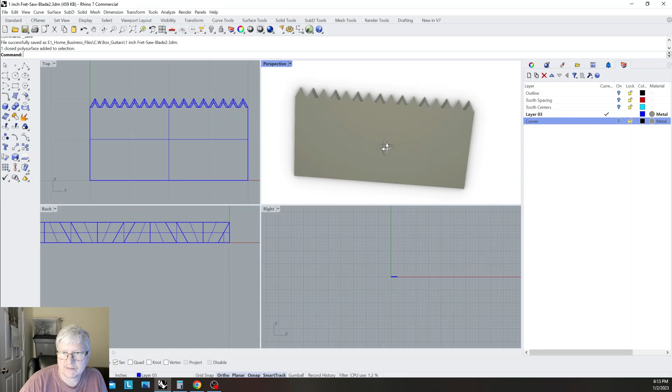And anyway, this is the saw, the blade itself. I'll draw the handle in later. And I thought, well, let me see if maybe there are some people out there in the world of the internet and YouTube that may want to take a look at how to draw this saw blade in Rhino. So that's what we're going to do.

So save the copy that I've already drawn. I'm going to go create new, and we're going to look at the small objects inches template for Rhino 3D. My blade that I'm using is a standard Lenox hacksaw blade. I'll post a link in the information for the video. You can buy these at, if you don't already have one lying around your shop, you can buy these at Lowe's, and they're fairly cheap.

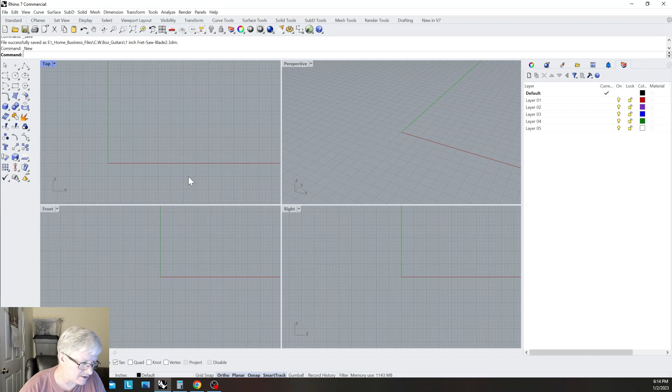But it's almost exactly half of an inch wide, top to bottom. So let's start there, and I'm going to look at this top perspective. If you double click on that, it enlarges the window to full screen. And I'm going to click on, this is the Polyline.

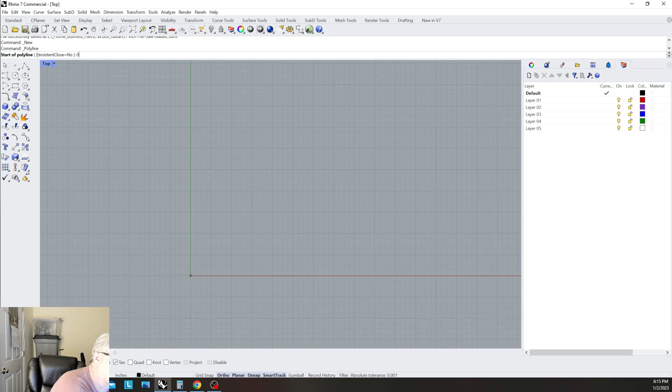I'm going to click on Polyline, and where it asks me to start the line, I'm going to set X0, Y0. Just type in 0, 0 and hit enter, and that's going to take me to the origin. And then I'm going to move my mouse over into this direction. And then if you look in the command window, I'm going to make 1 inch of blade. So I type in 1 inch and hit enter. Now I'm going to scroll my mouse wheel up, and that'll enlarge the view. That's how you zoom in Rhino.

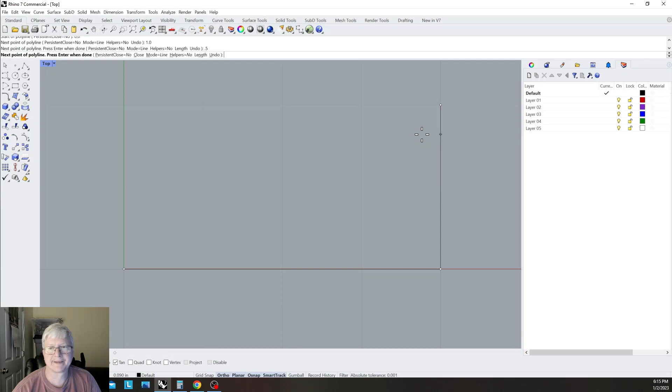Going in the same direction, or going in the up direction, I'm going to click 0.5 because it's half an inch and enter. And then I'm going to go back across to 0, and since I have the Smart Track on, I can go down here, and it'll track me to and snap to the 0 for the X. And then now I just go down to the start position and click left click, and it stops. And now if you look, highlight the segment we drew, it says one closed curve.

So now we have one closed curve that represents a segment of what will be blade. Now when we started Rhino, we have some default settings, and in those default settings, mine I need to change, I guess, but it creates this default layer, and then these other extra layers in the layer manager. And we're not going to use all these layers, so I'm going to go ahead and highlight those two and delete them. I know I'm not going to use those.

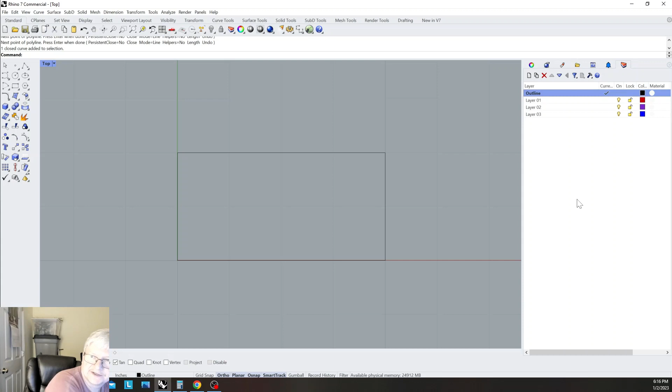And the default layer, I'm going to right click on it and rename this layer, and I'm going to call this outline. We're not going to keep any of this when we're finished. We're only going to keep the blade.

So now we have the outline, and now I want to go to layer 1, and I'm going to rename layer 1, and I'm going to call this tooth positions.

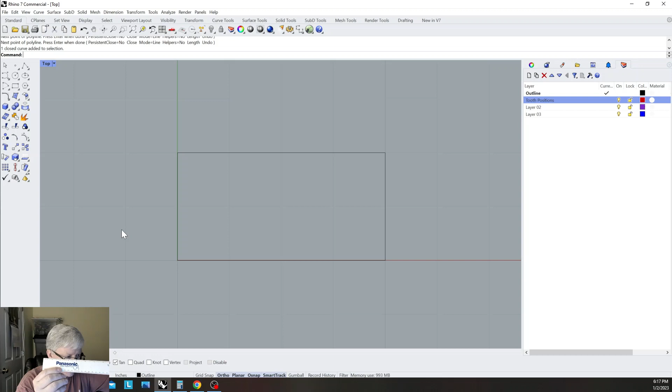Okay, and I am using a standard ruler, just imperial. I have 1/16 of an inch segments on here, so I'm going to space my teeth 1/16 of an inch apart. So depending on how you position it, that's 15 teeth per inch or 16 teeth per inch. The way I'm going to position it, I'll have 15 teeth.

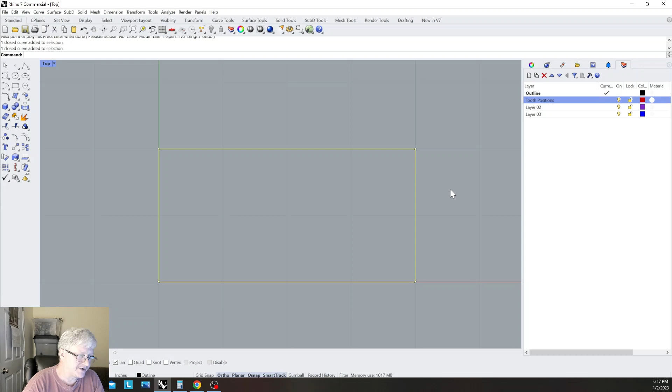But I also wanted to show you something. When I highlight this, what we drew earlier, because we started drawing a polyline and we didn't stop the command, it continued and made this entire closed curve. I'll show you why I wanted to emphasize that.

I'm going to look over here at my layer manager, and I'm going to make the current layer the tooth positions layer, which is going to be red. I'm going to go back here to the polyline and left click on it, and I'm going to click on this endpoint or intersection that will be the top of the blade.

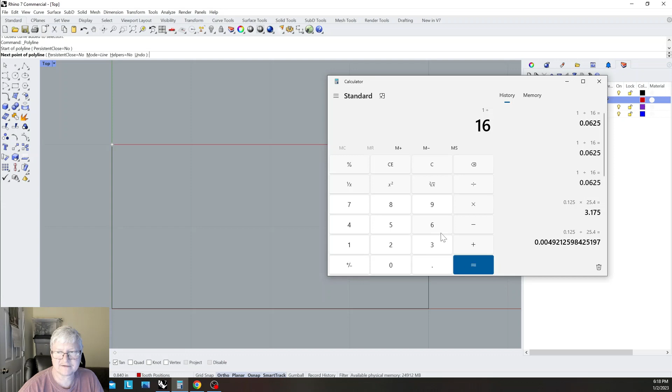Now I've selected it, and I'm going to start moving in this direction, 1/16 of an inch, which is 0.0625. If you take 1 and divide it by 16, which I've already done, you end up with 0.0625 in decimal. I'm going to paste this in here and start moving in this direction and hit enter. See, now it drew a red line 1/16 of an inch over.

And I'm going to go on down here until I am perpendicular and intersect the bottom of the blade. Left click, and now that I'm done, I'm going to right click.

Now I did this because I want to demonstrate to you, if you have a situation where you have joined curves and you don't want them to be joined, you highlight them and hit this button that looks like an explosion, because it is. This is explode, and what it does is break everything up to the smallest division. So if it's curves, it breaks them into individual curves. If it's surfaces joined together, it breaks them into individual surfaces.

And now see what this does for us. We can select the curve here, or we can select this curve. So now what we want to do is spread these out for measurements all across the top of our blade. There are a few different ways you can do this, and one good thing about Rhino 7 is most things have 2 or 3 different ways to do them.

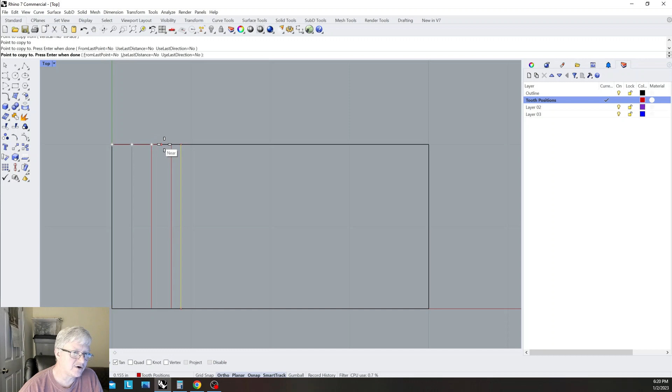Since I'm using transform copy, I left click, and as long as I don't right click or hit escape, it will continue to copy as many copies of this line or curve as I wish. So let's go ahead and do that and cover the blade, and now right click to stop. Okay, so those are our tooth positions.

I'm also going to do some vectors, some curves that will become vectors later for tooth centers. Now, you don't have to do this. I'm going to do this because I am making a jig. Later, I'll use this to make a wooden jig where I can clamp a piece of steel or an old blade and remake this.

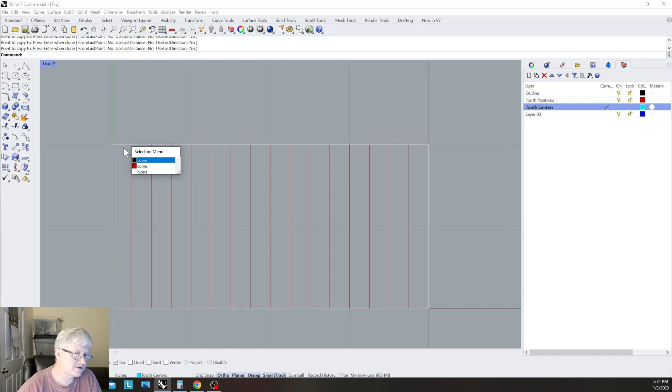So now I need to make it current. And you remember that little segment of blade, that curve I left up here? Watch how this is going to come in handy. I have my snap set also to the midpoint, so I'm going to choose a polyline again and see how it lets me snap to the middle. I'm going to snap to the middle, and draw another line that's perpendicular to the top of the blade. And again, I'm going to highlight this.

This time, let's use this copy here, the copy command. Now it's going to ask me where to copy from and then where to copy to.

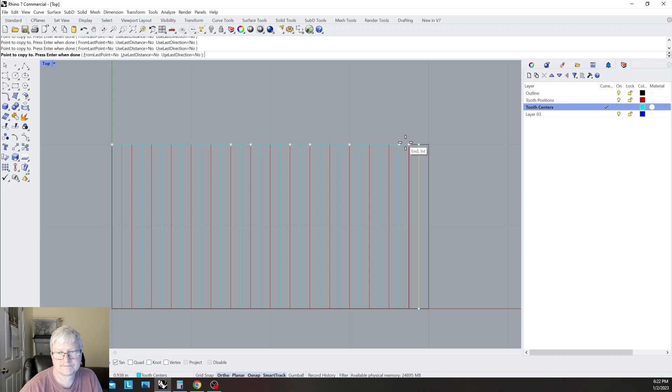Okay. Oh, messed that one up, didn't I?

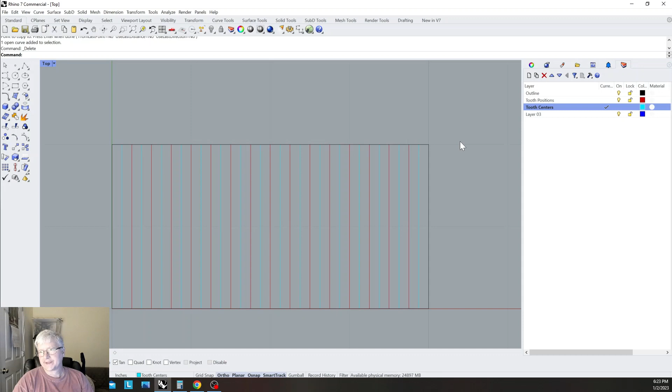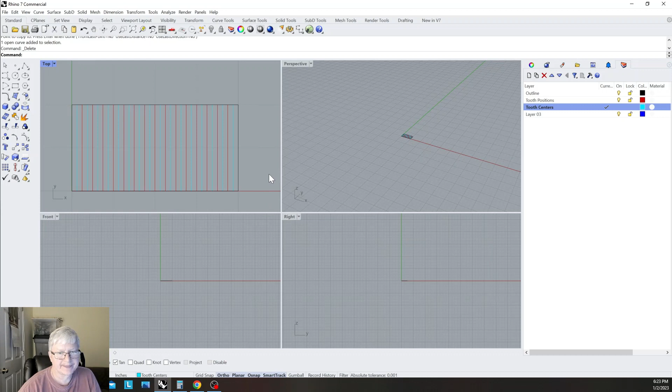Okay, so now I have tooth positions and tooth centers, and I'm going to double click this top viewport, and it'll zoom back out, and I can look at all four viewports. If you drag these you can enlarge the view you want enlarged. This is perspective, which is the 3D view. Of course, we don't have anything 3D yet, but okay.

So now I'm going to double click on this. We're going to be using a triangular file for sharpening the teeth once we start notching this blade, and the faces on the file are 60 degrees apart.

So we're going to click anywhere up here, it doesn't even matter, and we're going to go to layer 3. Yeah, let's do layer 3. We'll leave it blue.

We are going to click on the corner of the top of our blade, anywhere here, it doesn't matter. We're going to trim this in a minute. Now we're going to select that segment we just drew, and then we're going to say transform, rotate. When we go to rotate, the software is going to ask us where the center of rotation is going to be based upon, and then it's going to ask us for the first reference point, and that's going to be the end of our line.

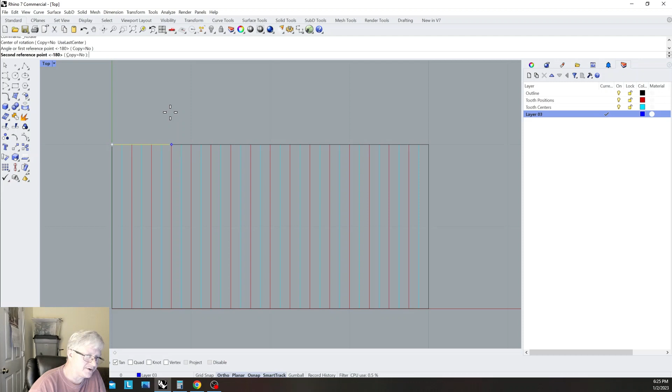Now we're going to go. We're doing 60 degrees. Okay, and I hit enter. Now watch, I hit line.

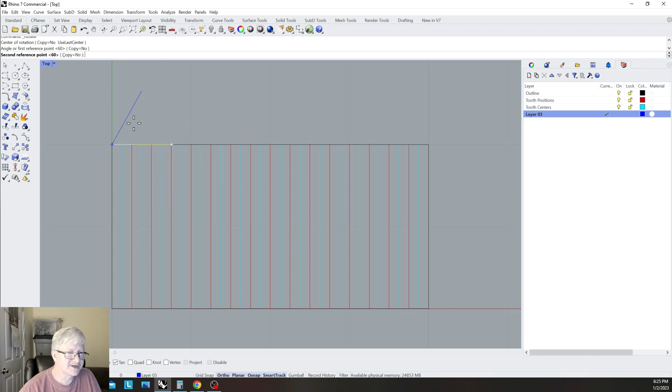And let's do here. Select our curve, rotate here to here, or that would be the center, and we're going to go minus 60 degrees. Okay, because we're going the opposite direction.

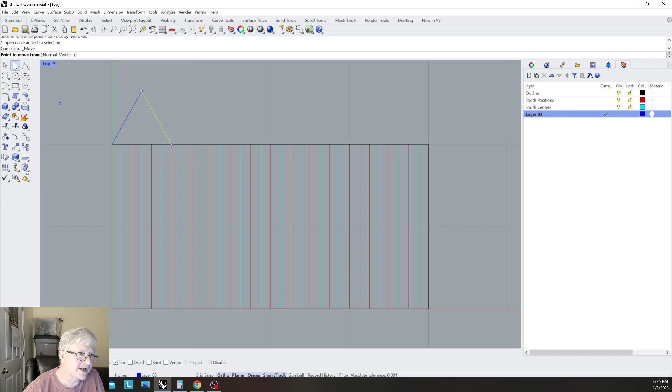Okay, now if you look at our tooth spacing, we're going to click on this curve, and we're going to use this move command, and it's going to ask us where to move from, and we're going to click on that mark and go over to this mark.

Now that these are intersecting, we can highlight both of these and we can type in the command trim. It's going to ask us the objects to trim. And you probably noticed I dragged from right to left.

So in Rhino, if you want to highlight a single item, if you drag from left to right with your mouse and let off your button after the selection window is covering your object, it will only select an object if the entire object is in that little view window. If you want to select everything that's attached, connected, overlapping, or intersecting, if you drag from right to left, everything it touches is selected.

Okay, so now we have one tooth, except now the tooth is of course above our workpiece. I'm going to temporarily select those and type in join, and that'll join them together.

If you don't remember that, which you should, you can go to where it looks like two puzzle pieces been placed together. That icon is also join.

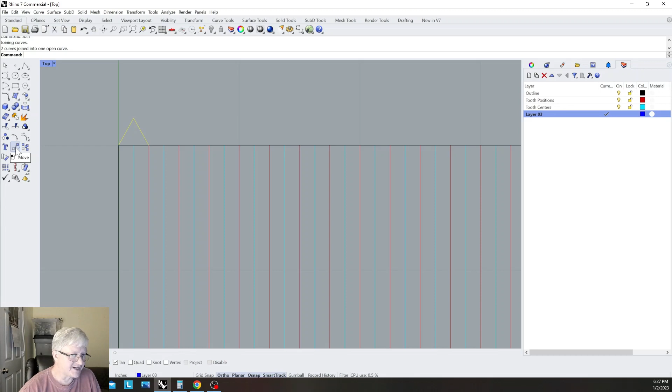And now we're going to take these two segments that make up a tooth, and we're going to move them. Select the point, center point.

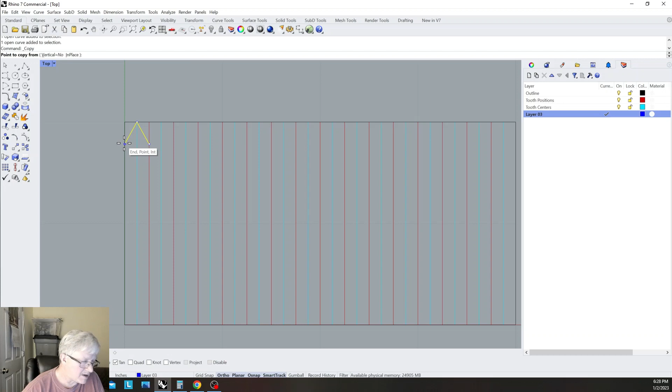Okay, so now that we have one set, or one tooth, we'll highlight that tooth. We'll go to transform and then copy, and then you can do it here or you can do it here. Either one's fine. I'm going to use the bottom of the base, left base of the tooth, but anywhere that you can align these is fine. It's up to you.

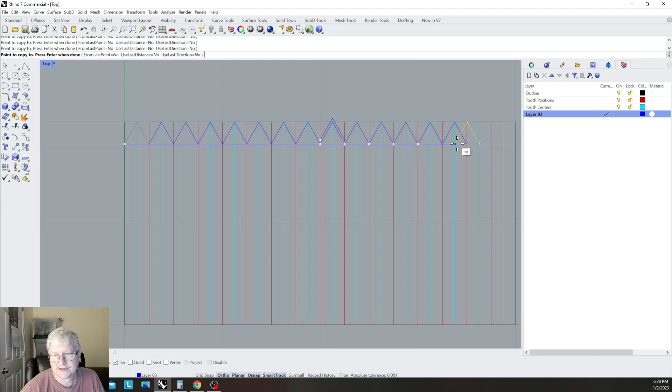Oops. Yeah, I'll just delete it out. I also have near selected, and I need to uncheck that in my snap settings. Yeah, down here I'm going to uncheck near.

Okay, so now we have all of these teeth, and they're all aligned onto the blade, and it's 2D.

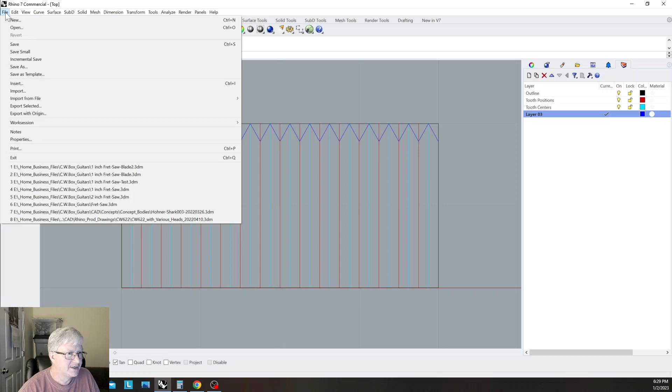Okay, so now is a good time to save our work. We're going to say save as, and let's just call this blade segment. Call it whatever you want. In fact, no, let's call it fret kerf cleaning blade. Good enough. And save.

Okay, so now you saved your drawing, and you have a 2D copy of your drawing. Now, we don't need all of this outline stuff now. So let's click on that outline, and keep in mind right now it's all a closed curve.

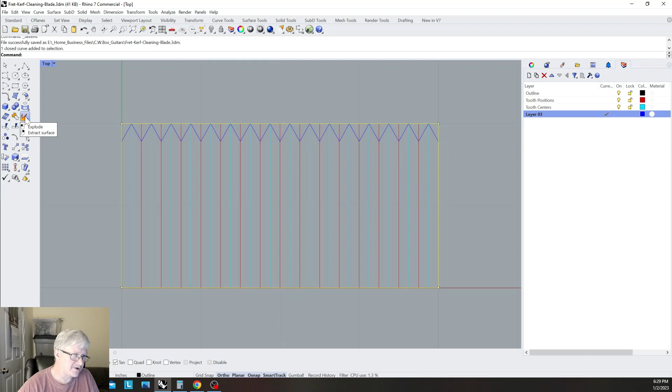So let's hit our explode, and then let's delete this top line. Let's delete that little fragment, okay? And then I want to show you another thing, well, first let's cut these off.

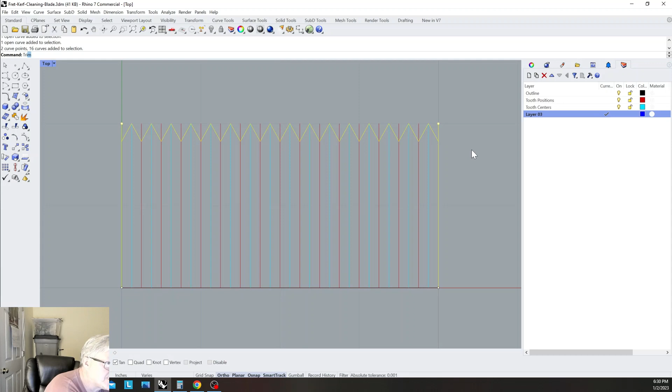I'm holding down shift when I want to select more than one object. So I'm holding down shift, I'm going to right click and left click and drag left to right. Now that I've selected it, I'm going to type in trim, and I'm just going to trim these off.

Okay, so these really don't have to be in this outline anymore. I want to show you how to change layers. We're going to select these three. Temporarily, let's join them - that's either this icon or type in join.

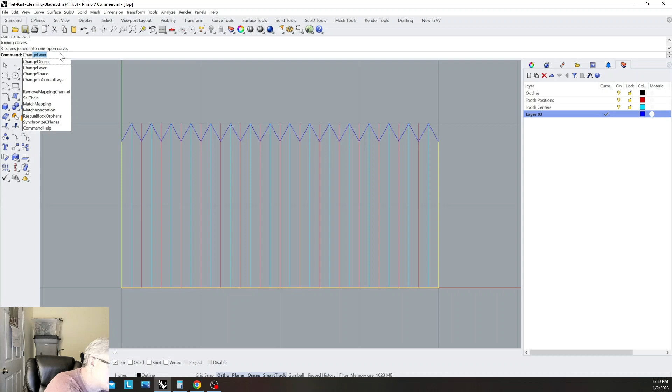Now let's go up here while we have them highlighted and type in change. If change layer is the command, keep typing and eventually it'll come up with whatever it recognizes you may want to use. And then we have this layer 3, that's where we're going to move them to. So now the teeth and this outline of the blade are in the same layer.

Now you can round this off the radius if you want. I'm not going to, because this is going to be a cut off segment of my hacksaw blade that'll be residing inside an oak handle, small oak handle.

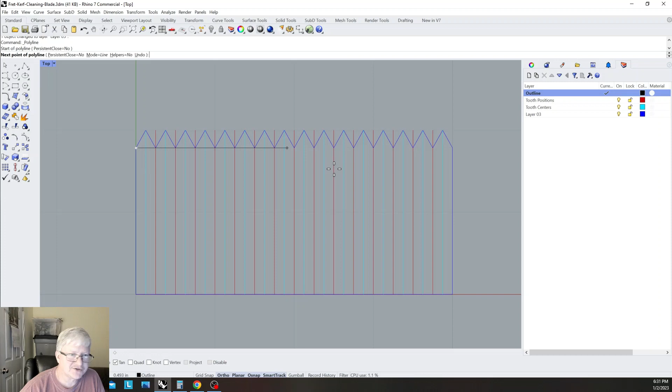Okay, but see these lines here? We don't want these to get in our way and confuse us, so let's go back to the outline layer and select it, and let's click on this polyline and draw a line across here. Left click, drag and highlight all of these, and type in split.

It's going to ask you for the cutting object. Let's select this line that we added and hit enter. Now look at what it did for us - every one of those lines has 2 segments now.

So now what we can do is we can go over to our layer 3, and we can toggle it on off, which is the light bulb. And now anything we do to this won't impact layer 3, it'll only impact the visible layer.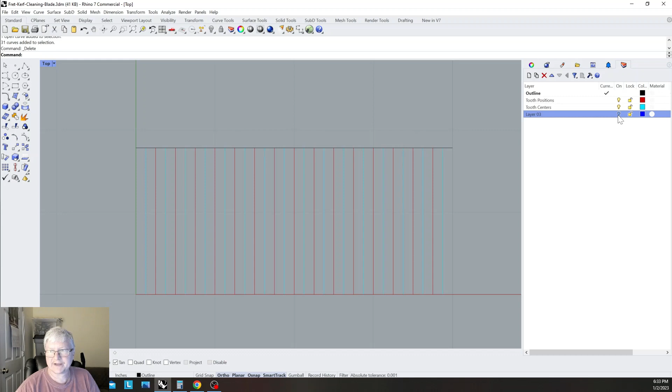And now we can start up here really close to the top of these lines and drag and select them and hit delete. And now let's turn that back on. Okay, and it's a good idea to hit save from time to time - you don't want to lose all that work.

Okay, so now we have this segment of the blade and we have the teeth. But our blade is 3-dimensional, it's not 2-dimensional - it's 3-dimensional, and it's 23 thousandths thick. And on top of it being 3D, 23 thousandths thick, it also has teeth that will be sharpened at an angle, and that angle will be 60 degrees.

So that means that as you're looking at one side of this blade, every other tooth will be sharpened where it's like a close view to you - that edge is sharp. And then if you look at the back side of that blade, the opposite is true. So this tooth, this tooth, this tooth, this tooth, those will be sharpened toward us. And on the back side, this tooth and this tooth and this tooth will be sharpened going the opposite direction. So that means we still have some work to do.

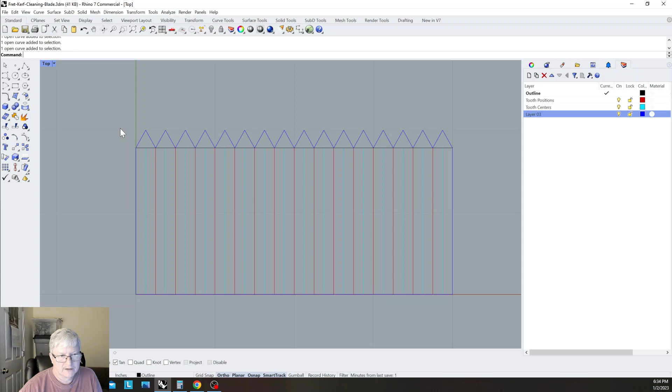And we also are going to need to copy all of this for reference. So let's go out of the top view, double click top, and let's scroll on up a little bit to our front view. And here, let's just double click to enlarge it.

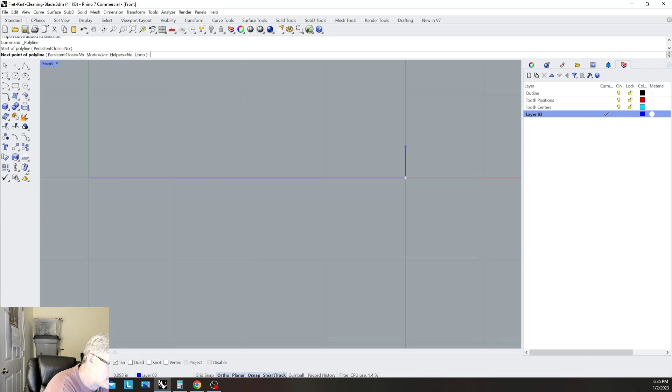And let's select our layer 3 and the polyline. We're going to click over in this corner, and we're going to start going upward, and we're going to type in 0.023. And now we have a 23 thousandths of an inch line there.

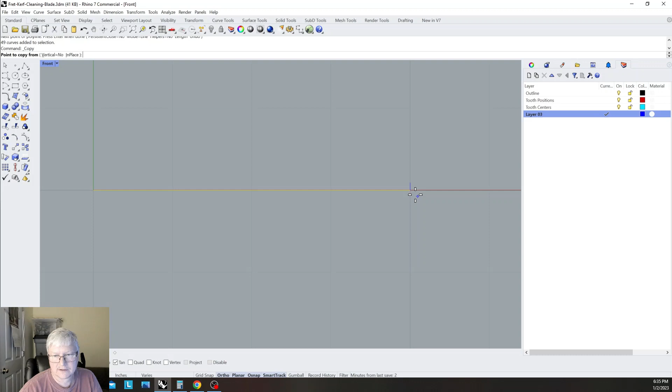Okay, so now let's highlight everything except for that line, and let's hit our copy icon and copy from here to there. Okay, so now what we should have - and by the way, while we're here, let's just go ahead and highlight that, copy from here to here.

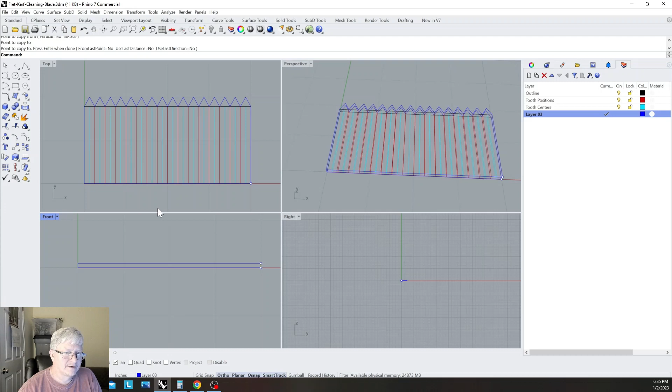All right, so now if you look in the perspective, double click on perspective. Now we have a 3D version of the blade.

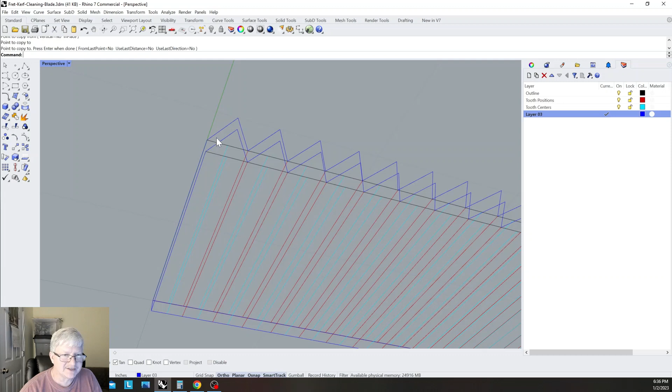Okay, now if you look at the teeth, we're going to sharpen this blade in a way that every other tooth will be sharpened at like 60 degrees - this edge will be 60 degrees, skip one, 60, skip one, 60, and then we'll alternate. The back, it'll be 60, but going in the opposite direction. I'll show you what I mean by that.

We're going to get our reference marks. If we go from here, it should be plenty long enough - here to here with a line. Now we select that curve and we say transform, rotate.

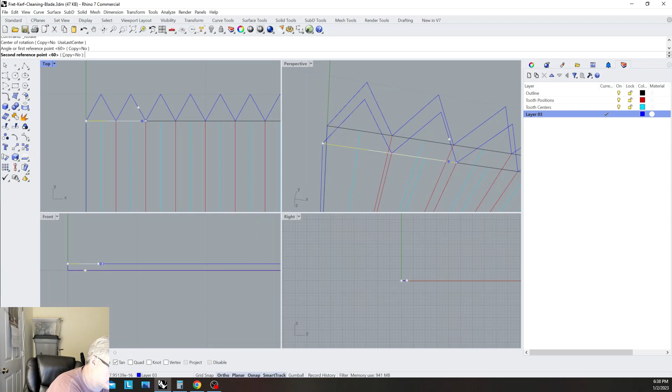And this is going to be the center of rotation. So minus 60 degrees. And if we rotate this view, what you should see is that minus 60 degree line intersecting with the back.

Sorry, I'm really sleepy, I apologize.

Alright, so now we have to turn around and do the same thing from the opposite direction. So we're going to click on a line, start our line. I'm going to draw it out here in space somewhere, and that's fine. And we're going to select the line, transform, rotate. And we're going to say, hey, this is the center of rotation.

And this is my line. And now I'm going to go this way, and I'm going to go 60 degrees. And we're done. Okay, so now we go over here and we look, and we have these two lines protruding through that back crossing line that we used for a reference, and that's why we drew that line.

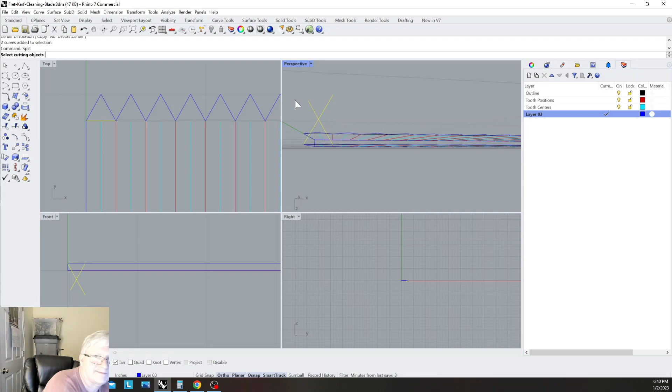So now let's use our new command we just learned a little while ago, and let's highlight these two, and let's say split. And now that we hit this line, those two are split there, and we can hit delete.

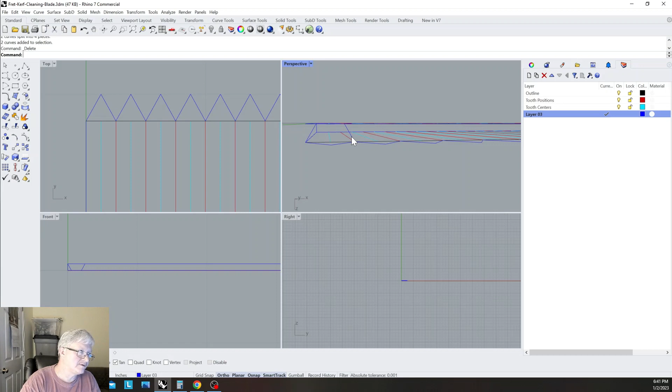So now what we're looking at is this is where we should be touching the blade when we start sharpening this blade at a 60 degree angle. And this is, you know, 60 degree opposite is actually minus 60 degrees, but anyway, complementary.

So now that we have that, we can cheat a little bit. We can take these two lines that we've already made, and we can copy these, and we can take these up here. So now we can copy these, highlight them, hit copy, and we can take this edge, and we can bring that edge to here.

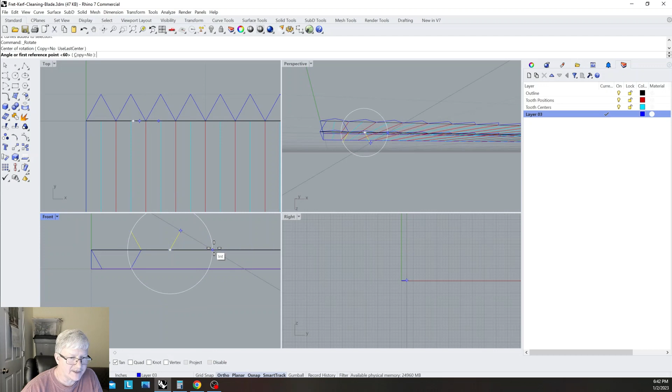Okay, now we got a copy, and now we can highlight those two again, and transform and rotate, and we can say this is going to be the center of rotation, and then we can pull that whole thing apart around just like this. And now we still have them highlighted, right? So while they're still highlighted, we hit move, and we take this intersection and we drag it over to here.

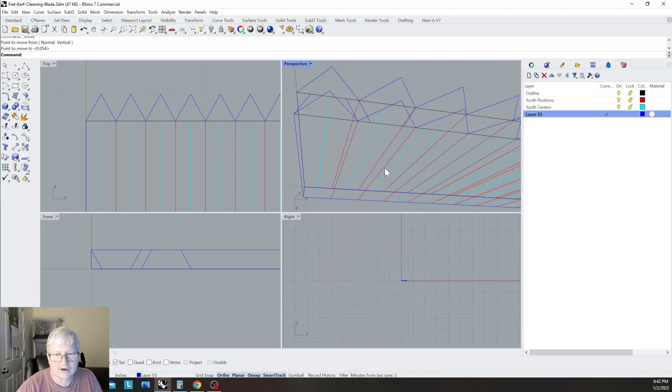Now I don't know if you're starting to realize, or if you're starting to recognize what we have going on here, but now we have these intersection points that we can use for this back triangle that will be the end of the cut.

We just simply click on this, explode it. We're going to explode all of them in a minute, but take that segment and hit move, and move it from here to here. Take that segment, move, and move from here to here.

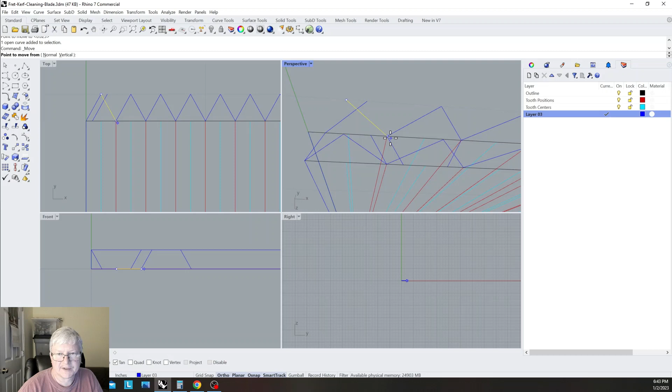And just like we did before, we can highlight this whole thing and type in trim, and then select these two segments, and there we go. So now we have the back, we have the small triangle size, right?

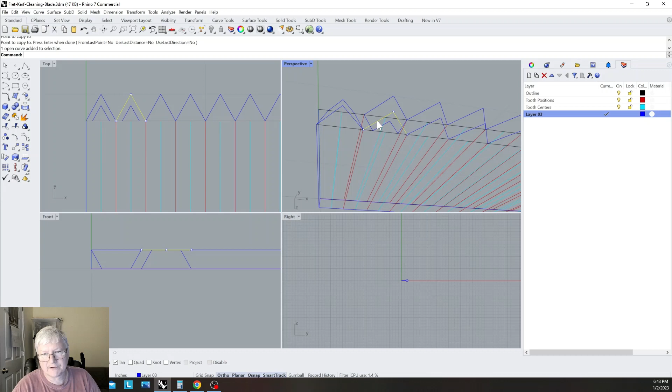So now we can highlight that small triangle, and we can hit copy, and we can copy from this position over to this position. And now we don't need this one anymore. This is what all of your segments are going to look like here in a moment.

And now we have to do one more small triangle segment. Okay, and how we can do this is, and again, it's all about speed. And if you look, we already have a segment that represents what this tooth is supposed to be. So if we go here and highlight that triangle and we hit copy, we can copy it from this point and paste it at that point. And then there we have it. We have full teeth.

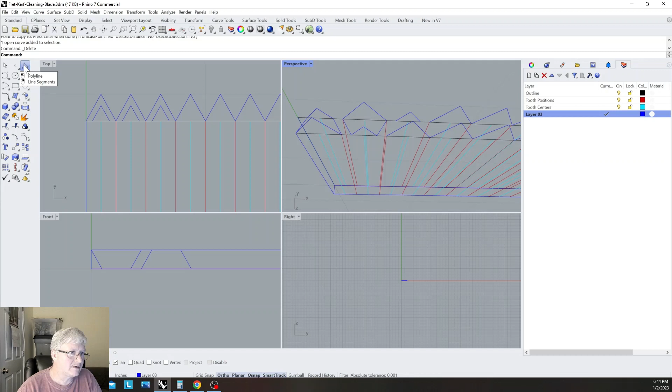We want to leave layer 3 on. We want to click on the polyline. Every one of these areas needs to have a curve. Okay, so that's done.

Okay, line from here to here. Okay, right click from here to here. Right click again from here to here. Right, and we're about to be at a point where we can copy all this stuff.

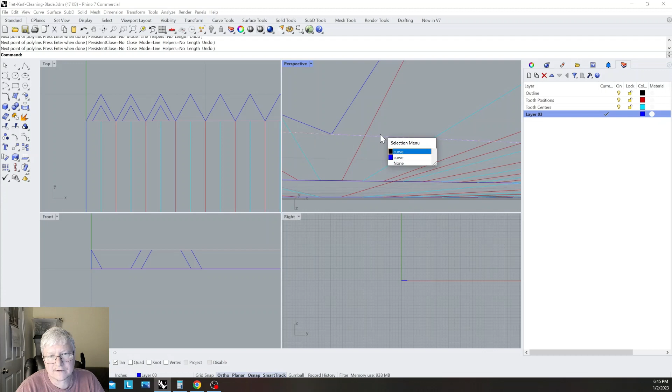Okay, all right. So this is nothing more than a continuation of these segments. So let's do this. Let's go ahead and close everything up. We have to make some surfaces.

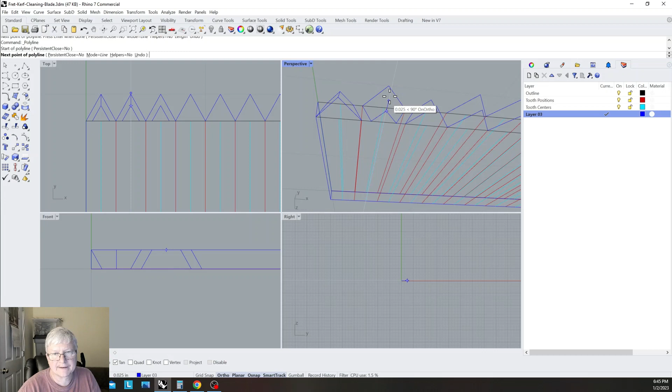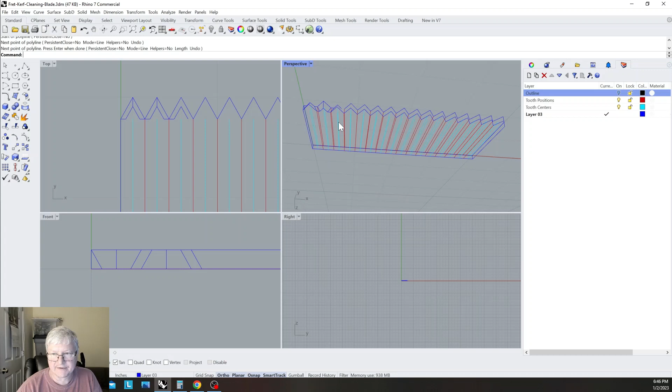Okay, now let's go to the outline and turn that outline off. And what you'll see is we have this segment, this segment, this segment, this segment, the opposite segment, and this opposite small segment. So now we really have everything that we need to finish making the blade.

So what we're going to do, we're going to cheat. First I want to show you a hide command. Left click and drag all of these and type in hide. It didn't delete them, they're just hidden from view right now.

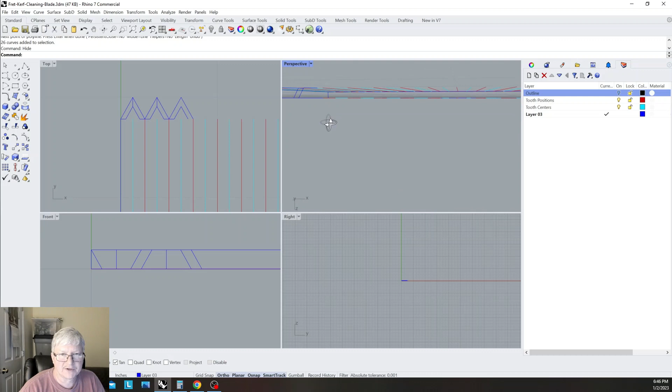Now let's move this around a little bit. We have to keep that segment, but we don't need these segments. I'm going to hide this, same as this, same with this, hide.

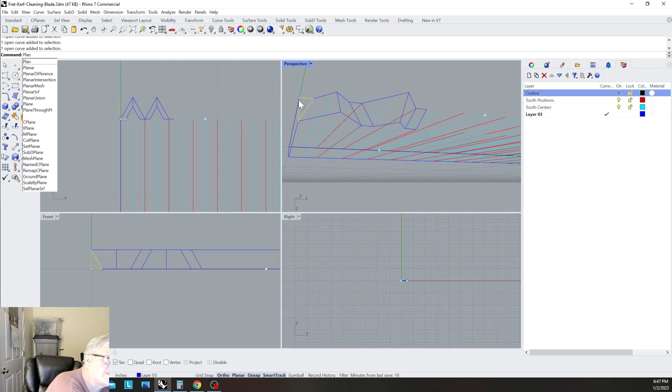Okay, so now we need surfaces, not curves, we need surfaces. So let's highlight a curve. We're going to highlight these three curves, and we're going to type in planar surface. It did surface it, but we need to change our view. We're in wireframe. Go to shaded and you'll see the surface.

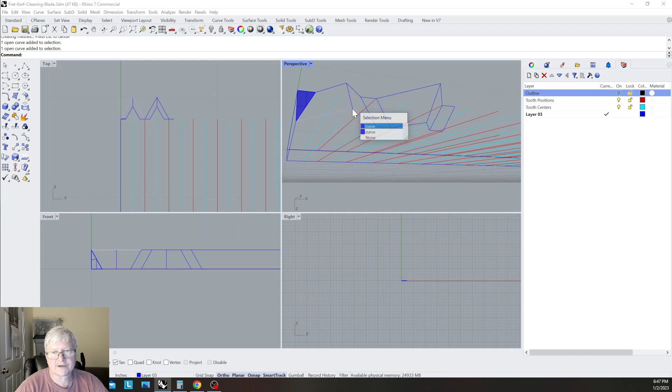So now we right click here and hit curve. Left click, curve, shift. Oh, hold on, we have to explode this stuff. Okay, so now left click and select the curve. Hold down shift and select these, and planar surface.

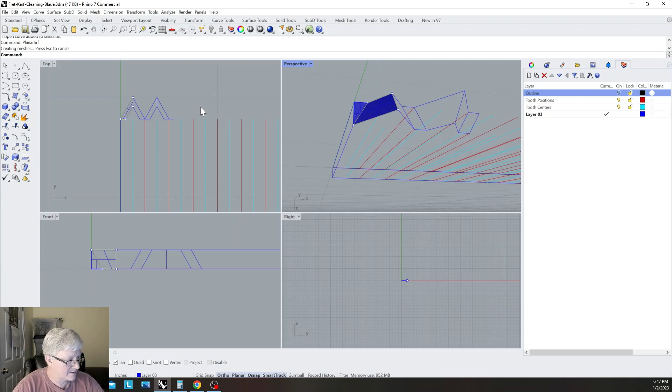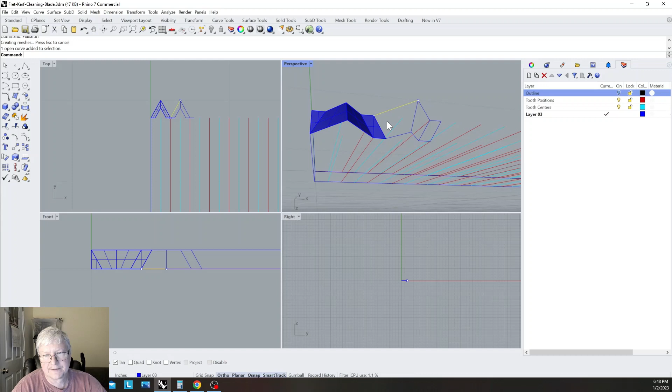Now, just like we did a moment ago, we're just going to right click to use this command again. Left click to highlight everything, right click. Select these, curve, right click these. Right click.

So now that we have all of these surfaces, we're going to select the surfaces, those surfaces, and join them. Let's not join the back yet, you'll see why. We want this surface copied to here.

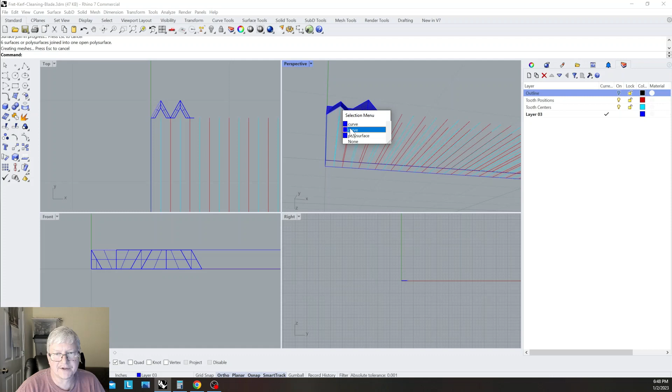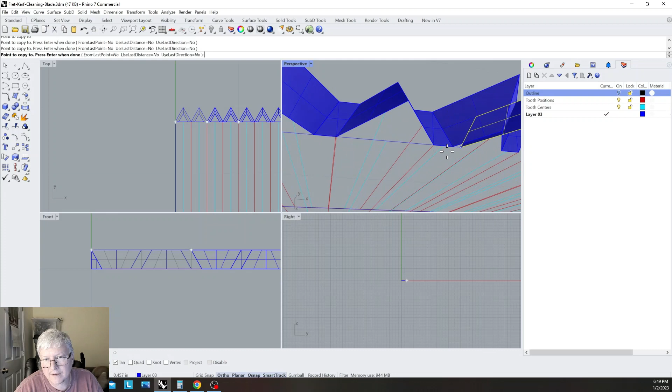So now we're going to highlight that, and we're going to hit the copy command, and we're going to click on that corner, and there. And there. And there. And there. And there.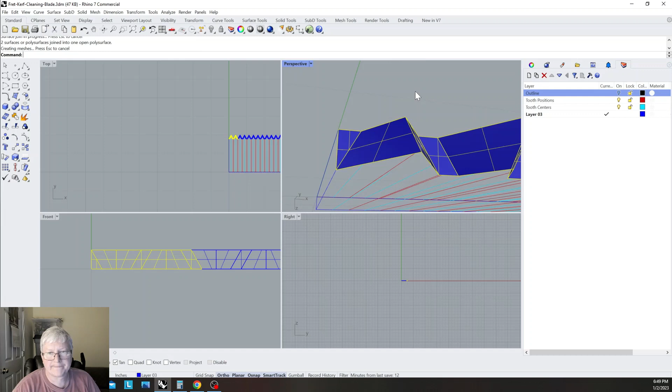Okay, so now we can go over here and select this segment and this segment and join those. Now we're going to go over here to this last segment, and it's hanging over, right? We already have a curve there underneath here, we have a curve here.

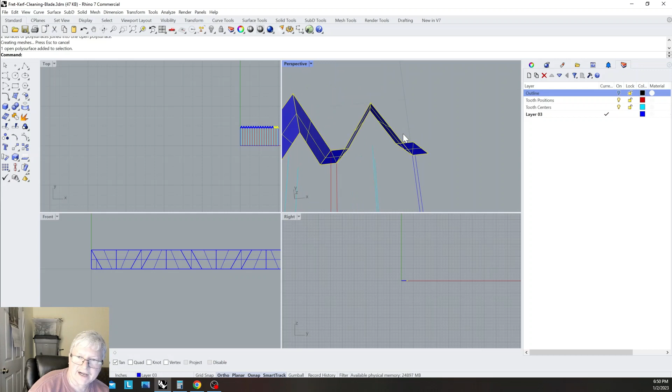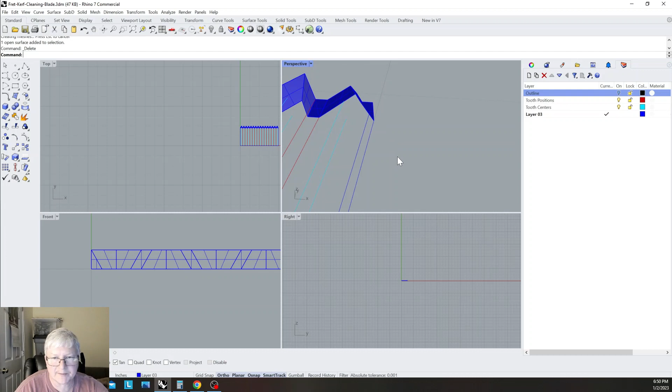So we're going to do just like we did before, and we're going to highlight this, and type split, and the splitting object is going to be this curve. And then we select that piece and delete it. Okay, so there are all of our teeth.

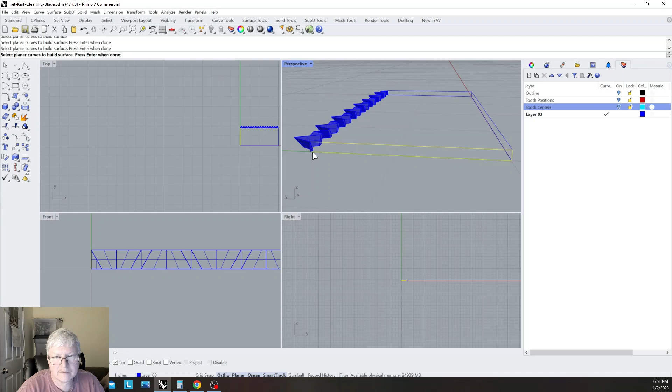So now we can take all this other stuff and turn these layers off. And we'll go over here, and you know how we did the planar surface, we'll select, we'll explode these, and then here, here, here, and you can hit curve or the edge of the surface. Oh sorry, it's asking me to explode. Click yes, planar surface.

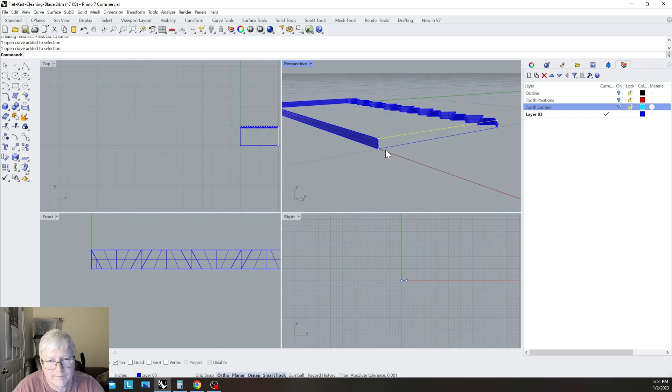Planar surface. Okay, all right, so now surface, we're going to join these. Now hit join, those are still highlighted, right? Just shift, join. I'm basically just keeping them highlighted, holding shift and left clicking, and then right clicking. So I'm just continuing down.

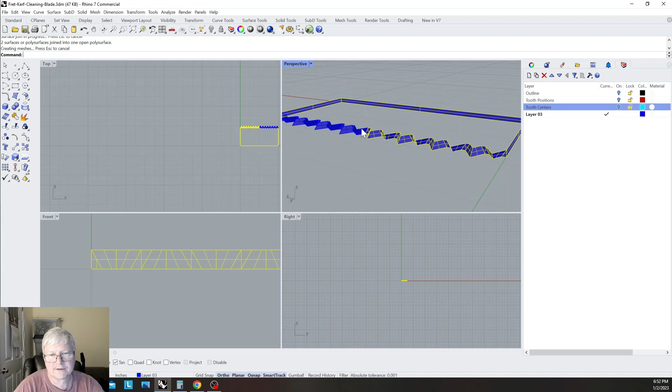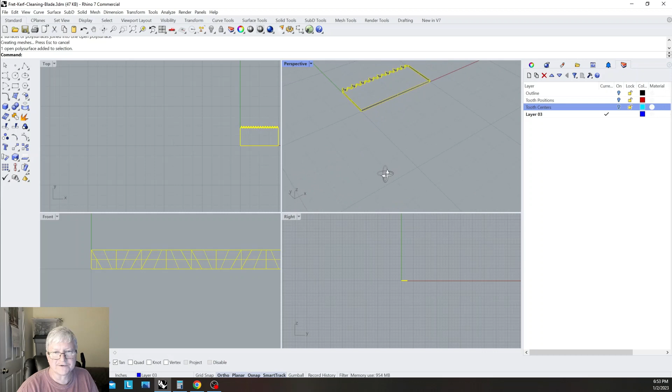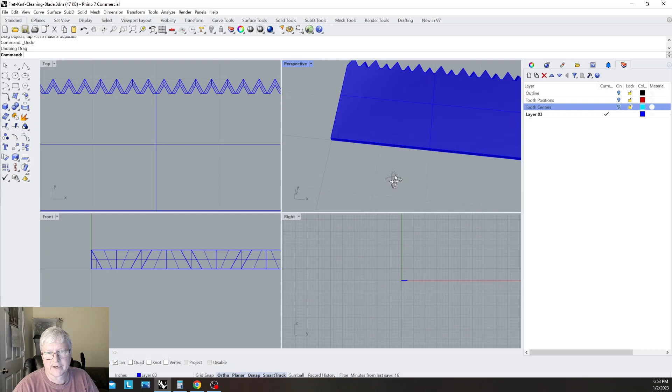And if you notice at the end, it says two surfaces or poly surfaces joined into one open poly surface. So this is an open poly surface because it doesn't have the front or back in it. Now there's an easy way to do that, all we have to do is click on the poly surface and type in cap, and now the software created a cap on the back and the front, and you have now created saw teeth.

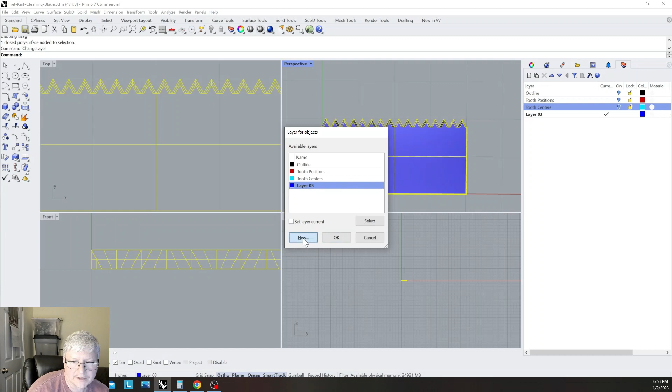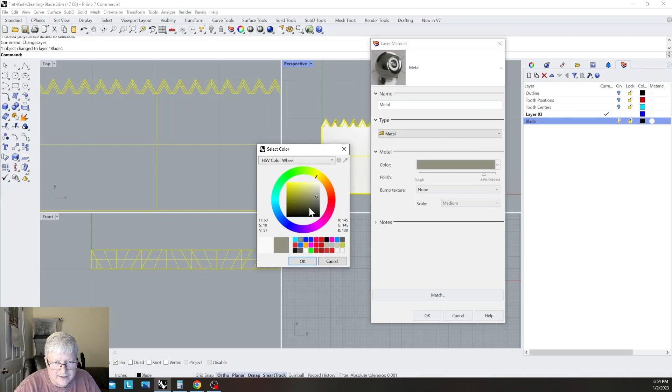Now watch, we highlight the poly surface and we say change layer, new layer, and we call this layer blade, and hit OK. We leave it black. We change the material, add a new material, we're going to use a metal material. We're going to change the color, go pick something that looks kind of like a blade. We hit OK, OK, and we'll select this layer, turn this layer off, and now change to rendered.

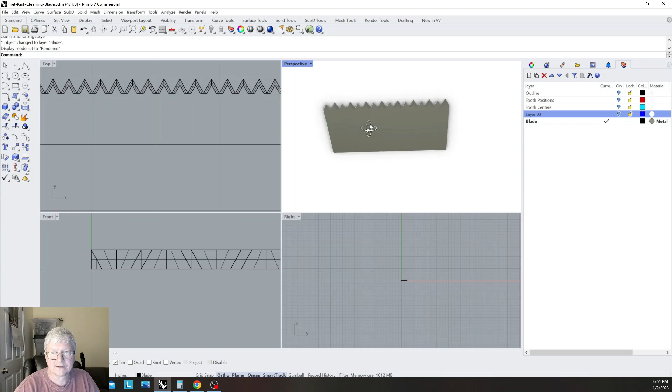And now you have a blade. You just made a saw blade, if you followed along anyway. Let's go back to shaded, we'll just turn the layers off, that way if you want them, you have them. But anyway, that's it, that's for the blade segment. Now just save your drawing, and there you go, you just created a blade.